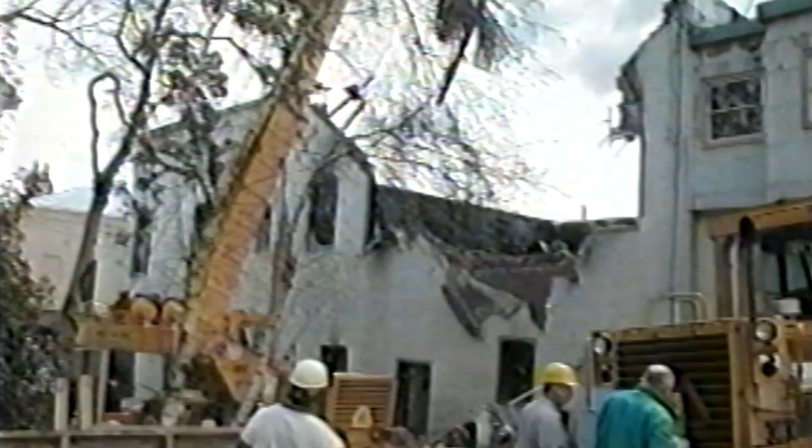After the fire, the first big step was to secure the site, make it safe for people. We immediately hired Robinson Enterprises, a very skilled group of people with lots of equipment. They secured the site. The first thing that happens in a devastating fire like this is there's a huge fire investigation trying to determine the cause. The first month we were slowly removing material so that they could peel back the layers and try to get to the core of the origin of the fire.

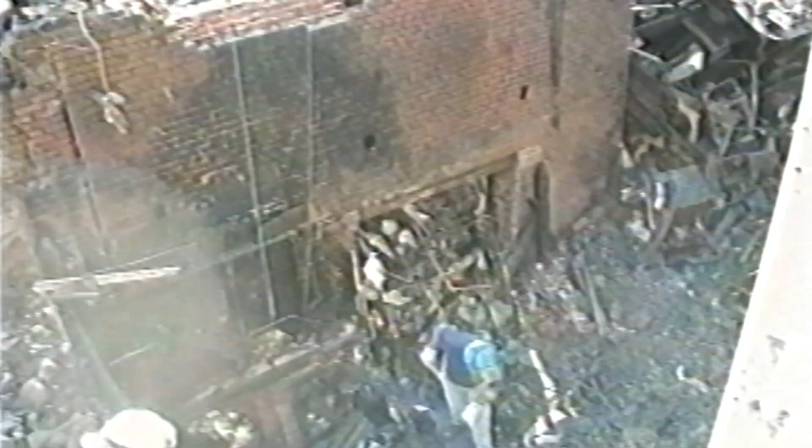Once the fire investigation teams determined that arson wasn't the cause, then they backed away, because the real cause is not as important as long as it wasn't arson. But after they finished their investigation, they released the building for demolition, and within an hour the building was on the ground, because it was a safety issue.

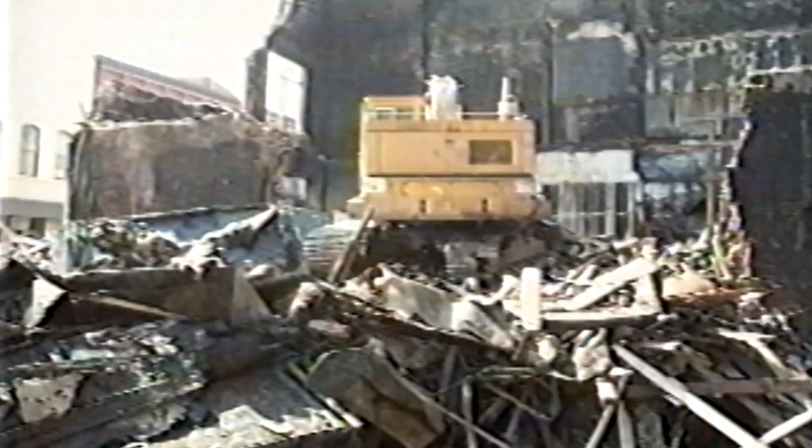We were all worried about the big, tall brick walls falling into the street, so we got the building on the ground. Tremendous volume of debris had to be removed. All the debris was hauled directly to Nevada, and the site was cleaned up. That process took about 2 weeks.

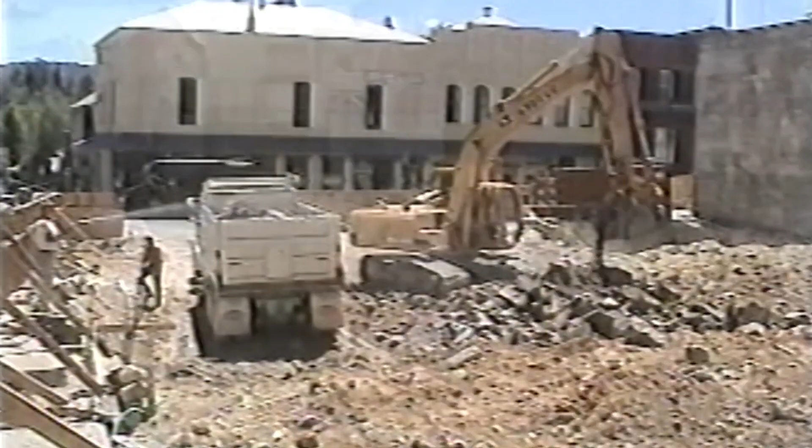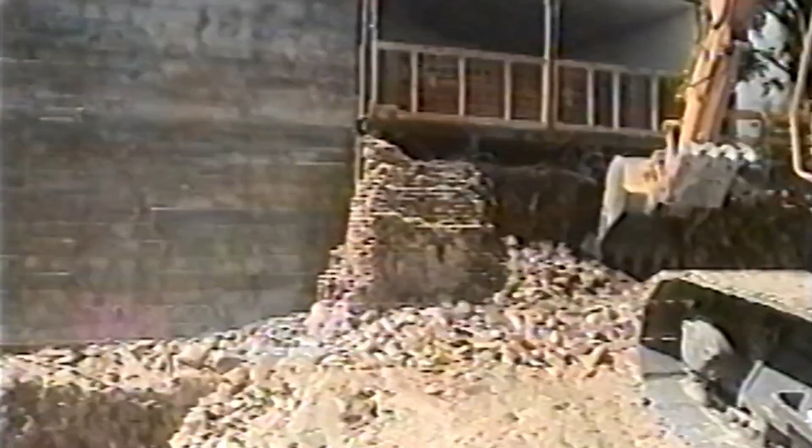We had some difficult phases to complete. We excavated back under the old theater and had a lot of retaining wall issues against neighboring properties, because, you know, these buildings are all built right to the property line, and it was very, very tough.

The theme was the heart and hands of Nevada City, a proposal that Leanne Brooke had come up with as far as decorating the protective barricades we had to build around the site. Hundreds and hundreds of people placed their handprints on the barricades and wrote their names there, and it was something that added some beauty to a site that was just so devastated. And it was very special.

I've never ever seen a site that had that sort of personality. Leanne Brooke really needs to be commended for her thought process. She wasn't a business owner, she wasn't really directly affected, but it was a contribution she wanted to make, and it was great.

The first step in rebuilding the building was, number one, trying to develop a plan of how we're going to do that, and the first part of that plan is to get an architect. The process has been great. I love the people I've been working with, and it's just been a collaboration. People come up with ideas, and because it's sort of been a fluid process, things can get incorporated.

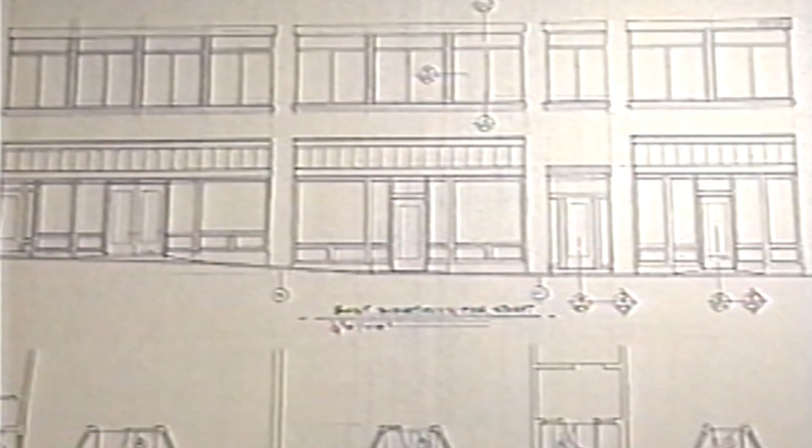So Bruce went to work within the first week on redesigning the building, and within maybe 3 weeks we had the exterior elevations done, and we had that proposal before the Nevada City Planning Commission within a month. To be able to go to the Planning Commission with a drawing like this and a stack of brick, and have them say, okay, go for it - that shows they had a lot of confidence in the team to put it together. That this is a joy to work on.

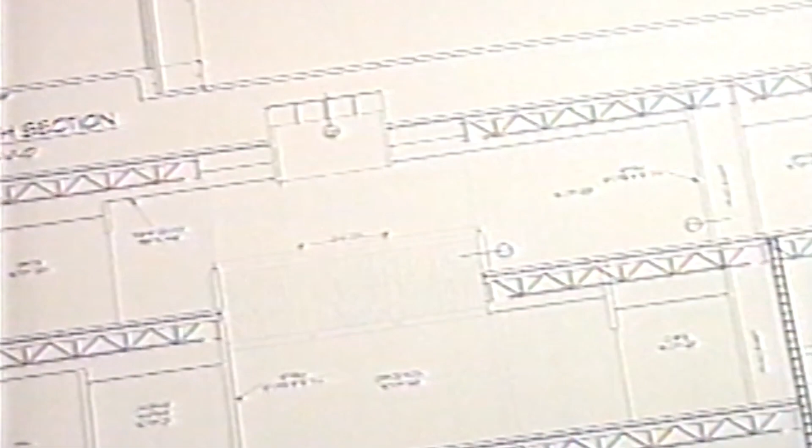Maybe other people didn't have as much joy as I did, I don't know. But it went pretty smooth, and had very little problems in creating the building once the drawings were completed. The only large change was in the foundations, which were major, but that's the first thing - if you don't have good foundations, you don't have a good building.

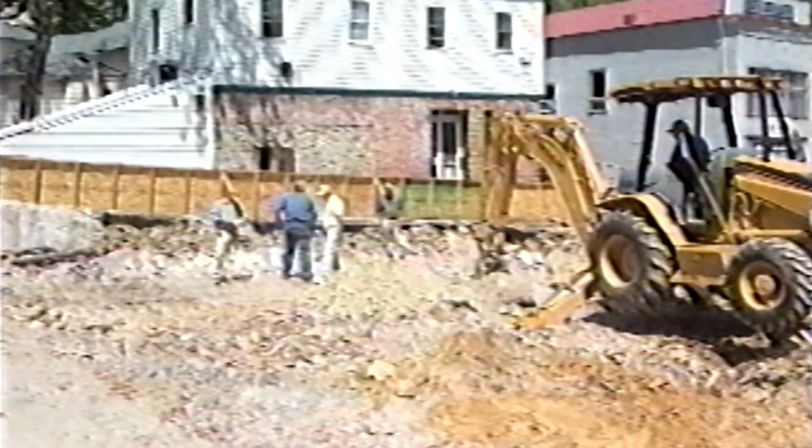Our soils investigation uncovered a riverbed and unsuitable conditions to support a standard foundation with footings. So the design was a pier and grade beam system where you drill piers, fill them with concrete, and on top of that pour a grade beam that spans the distance in between the piers.

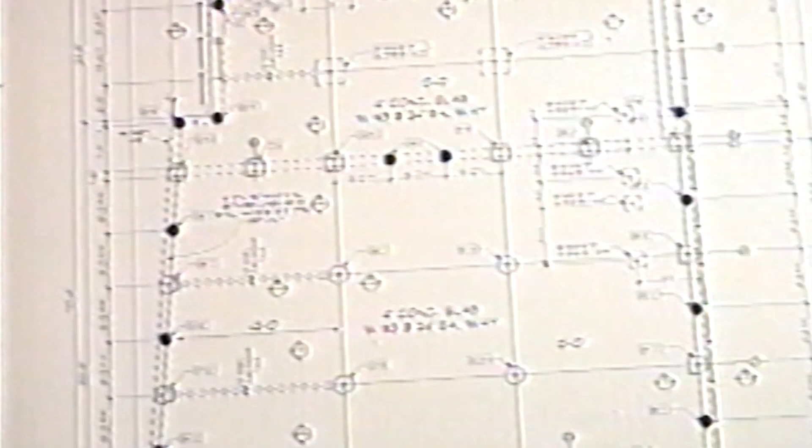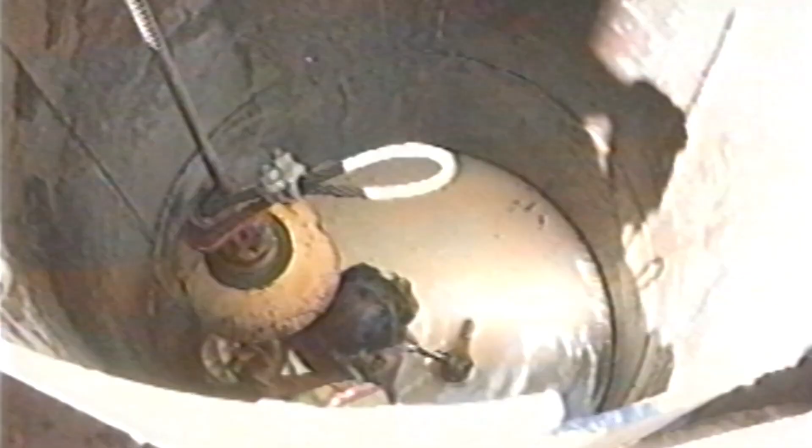So the drilling people I had to bring from down by San Luis Obispo, costing about close to $10,000 a day to have these people on site, and immediately started hitting groundwater. Now you can't pour concrete in a normal manner. You have to start pouring the concrete from the bottom of the hole and force the water out with the concrete. We had a swamp on the site.

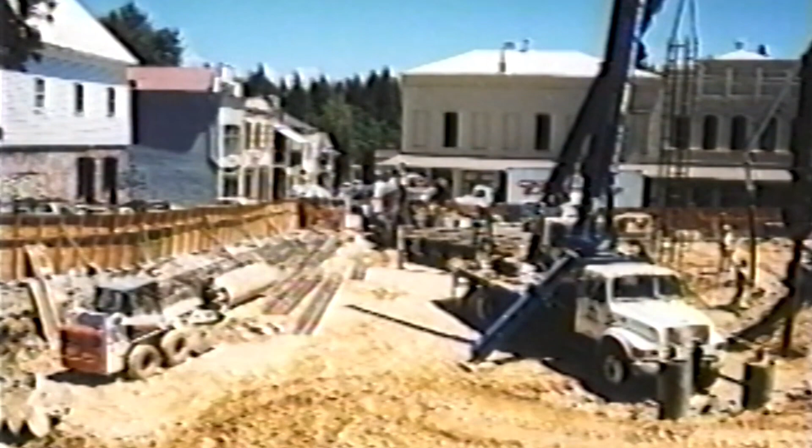I mean, it was an unbelievable, depressing mess, and it didn't seem like anything was going right. It was a process that lasted over 2 times longer than it should have.

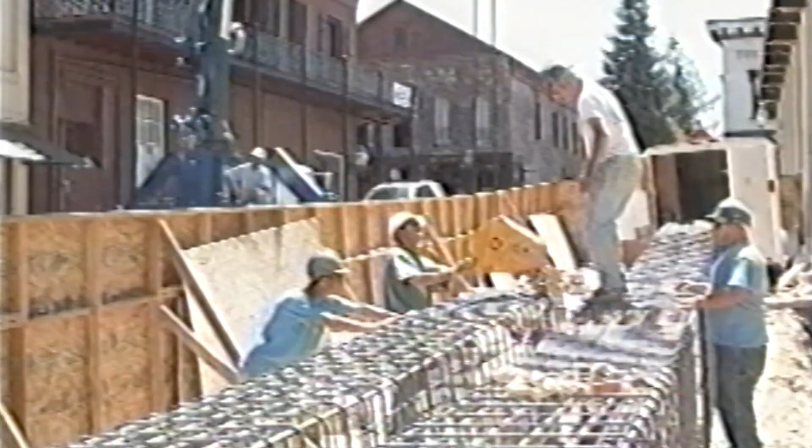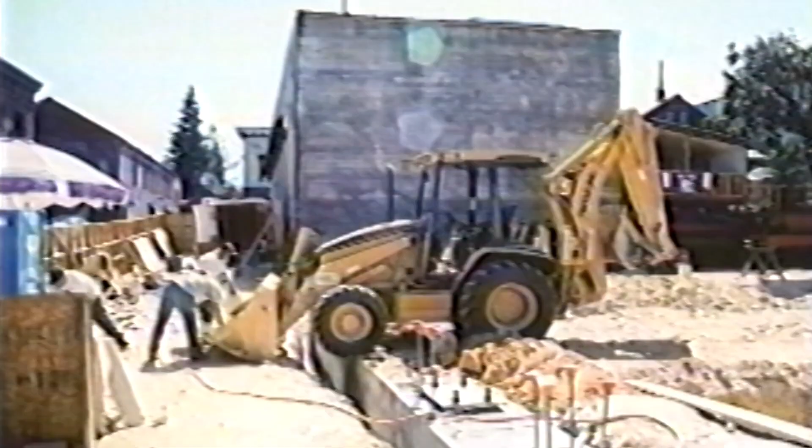The only good thing about it was that it ended and we were done. And it was a great feeling to have the drillers finally leave the site. Then we could get into some more normal foundation work, which was pouring the beams across the top of the piers, etc. A normal house foundation may have 60 or 70 yards of concrete, and the foundation of that building has over 2,000 yards in it.

So it's unbelievable. And then while they were putting in the footing and foundations, they finished the working drawings and kind of dovetailed them in. That took a little bit of work, and it wasn't so easy to do because there's things on the working drawings that overlap into the footings and foundations. It's just not a simple one, but...

Here it was, the biggest building project done in Nevada City for I don't know how many years, and it was going to be fast-tracked. First time a building had ever been fast-tracked in this town.

And so with Bill Falcone and Conley Weaver working directly with Bruce Boyd, scheduled weekly meetings every Tuesday at 1:30. All the issues were brought out in the open. All the design as it progressed was reviewed. As important as this project was, we still had to respect the city ordinances and the historic ordinance, and everything went through the exact same process anybody else had to do.

It's important that everybody know that this was a joint effort of the people of Nevada City. That includes the Planning Commission, that includes the City Council, the Chamber, all these people putting up with this and saying, okay, we're going to be in the mix.

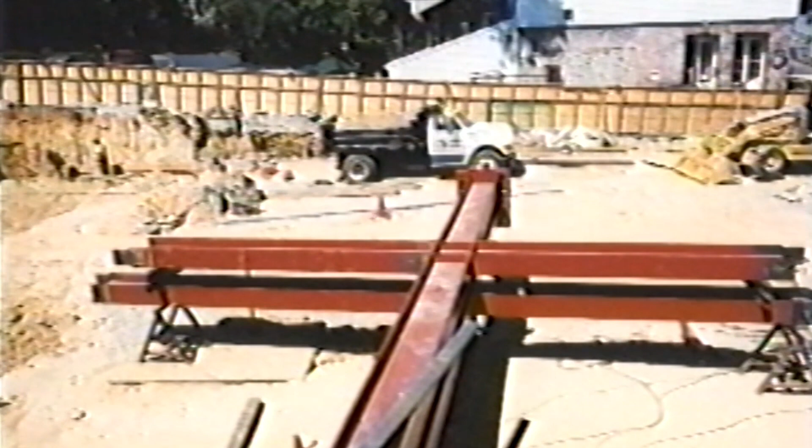I remember that meeting we had sitting around this table with Bob Porta and his couple of assistants and myself, Ray Powers and all here. Here we've got the site over there, we've got all the steel sitting over there. And the man that's supposed to be issuing the permit saying, yeah, I'd like to let you start putting that up, but I really can't.

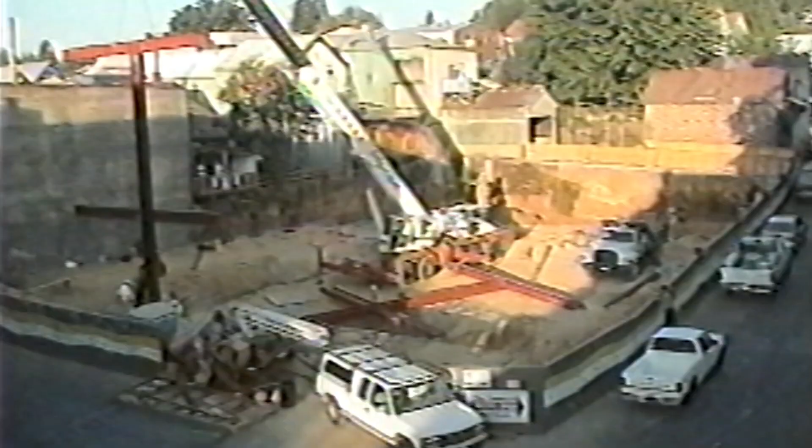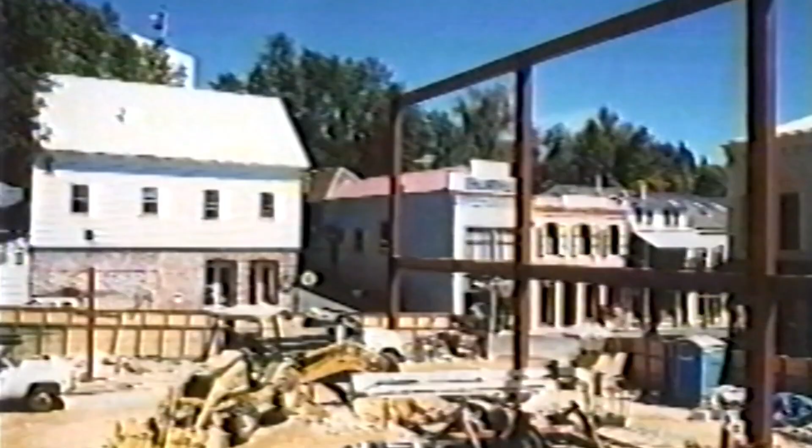They say, well, what can you do? So there was a back and forth, really back and forth bargaining to keep it flowing. The main thing we didn't want to do was... As we started putting up the steel, the first piece or pieces of steel that went in, it's the integral part of the structure of this building, called a rigid frame. So that rigid steel frame is what is providing all the structure, both horizontal and vertical, for earthquake and wind.

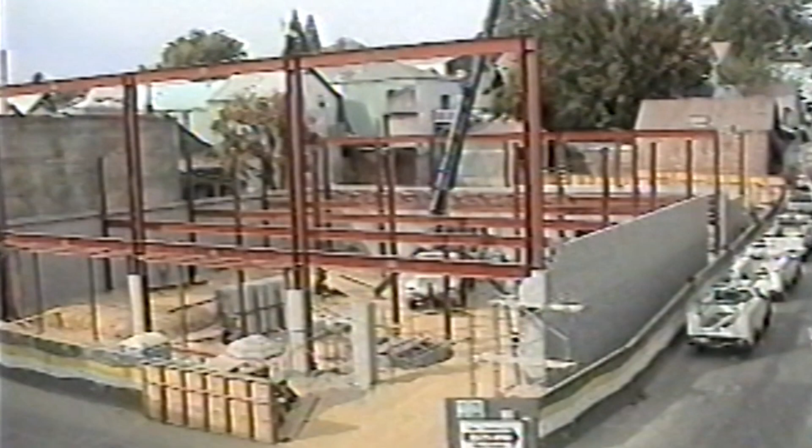I look at a building differently than everyone else. I look at the structure, and when the architecture gets in there, it closes up everything I like. I like to see the bones of the building all up and painted and looked well. I just didn't leave it that way, but that's the way it goes. My business is that way all the time.

The building, as we designed it, became basically a steel structure with a masonry exterior for strength, with a brick veneer on it. The masonry of the building is an integral part of the structure. It supports the floors in between the steel beams on the exterior. So the steel has to go up on a level, the block masonry needs to go up and be filled with concrete, and steel ledgers installed that carry the floor.

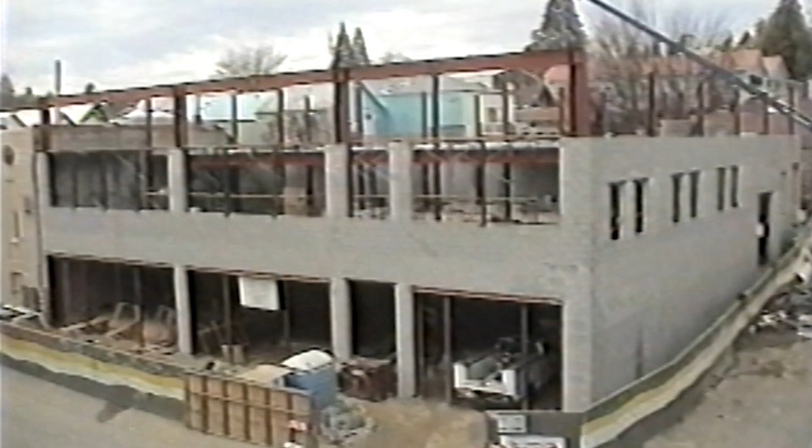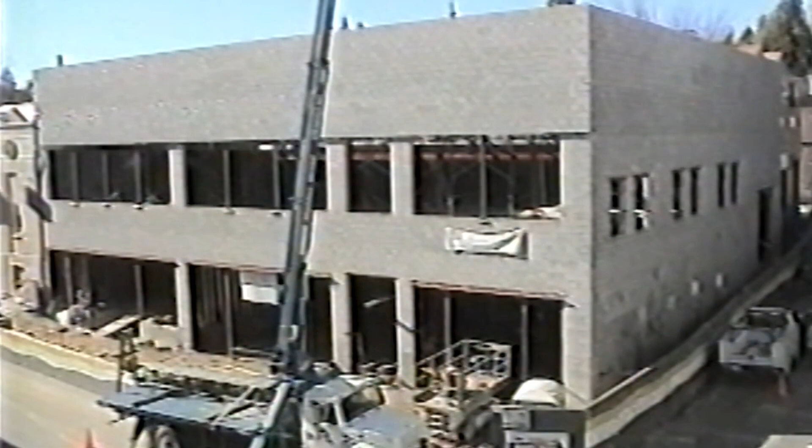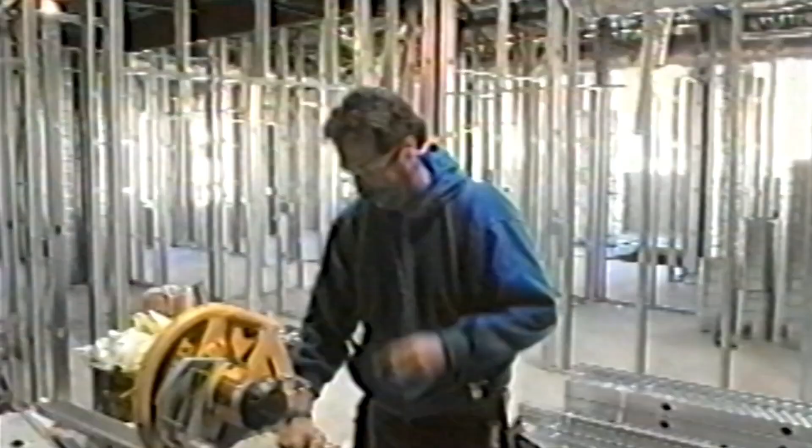Then the floor needs to go in. Then more steel can go up, more block can go up, etc., till we get to the roof. All of the floors of the building, including the roof, are all concrete. All the interior framing of the building is metal - we use steel studs exclusively. The building has a completely up-to-date fire sprinkler system now. Everything is up to code, so we have one heck of a building.

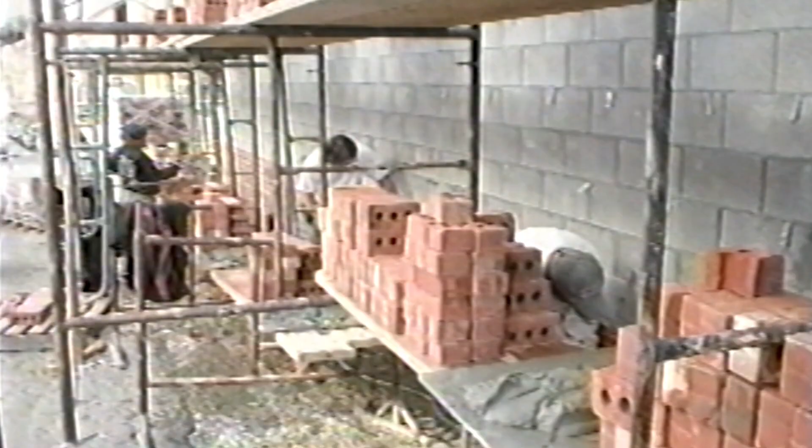Then we must have looked at 100 different bricks, and the qualities and how they're made, and what they consist of, and how they got their color. And I think Gary has a number of bricks in this building, but it must be close to 55,000 bricks or something like that.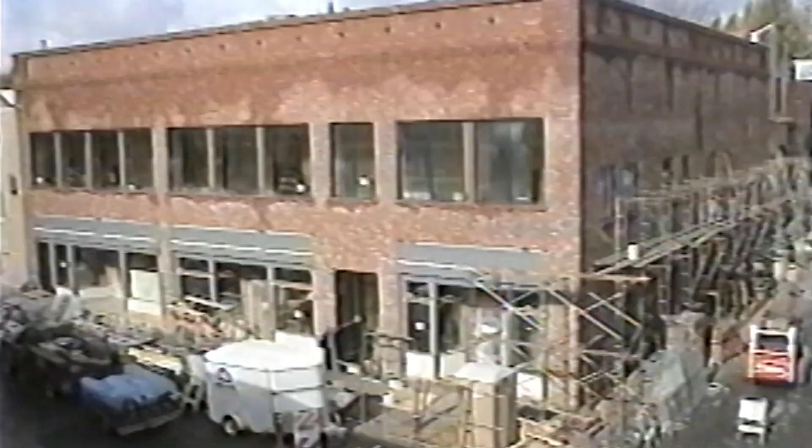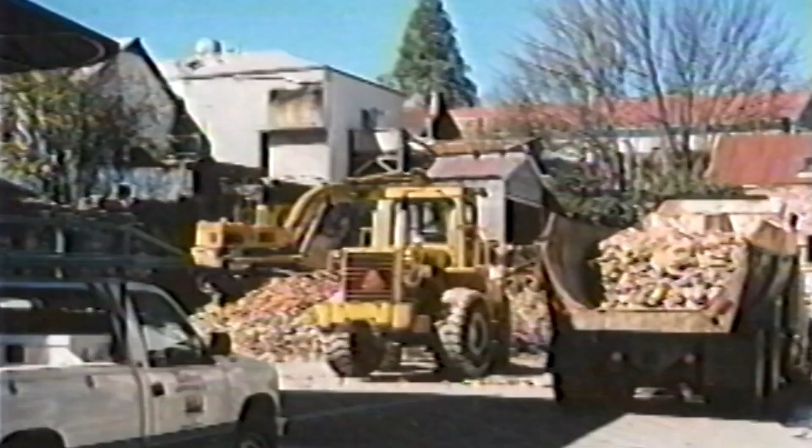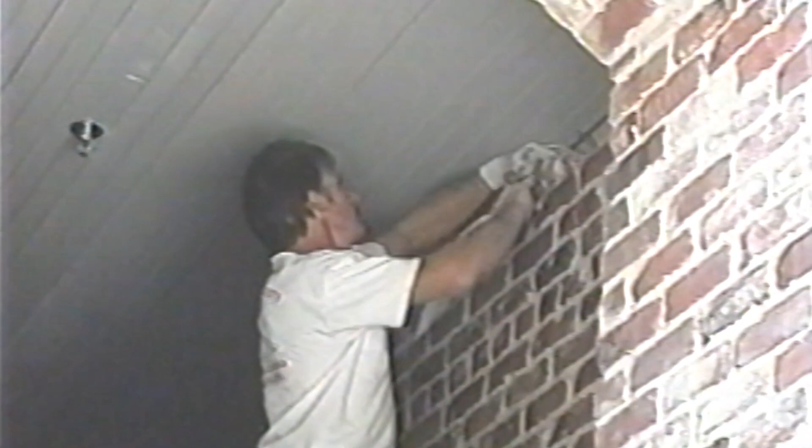During the course of the demolition, we had generated a huge amount of brick. We hauled all the brick to the old North Star property. We had 6 people cleaning brick for 6 weeks. They're just really nice looking brick, and we wanted to use them. The city jumped on the idea, and we got approval within a week to reuse those bricks on the old theater. It's a really nice feature of the building to retain those.

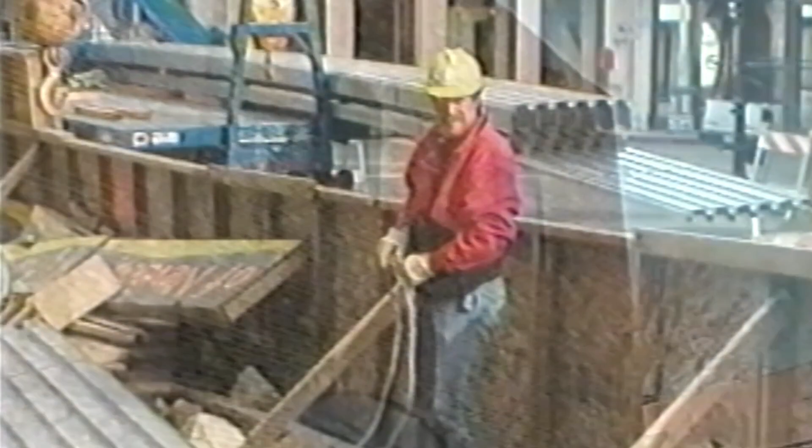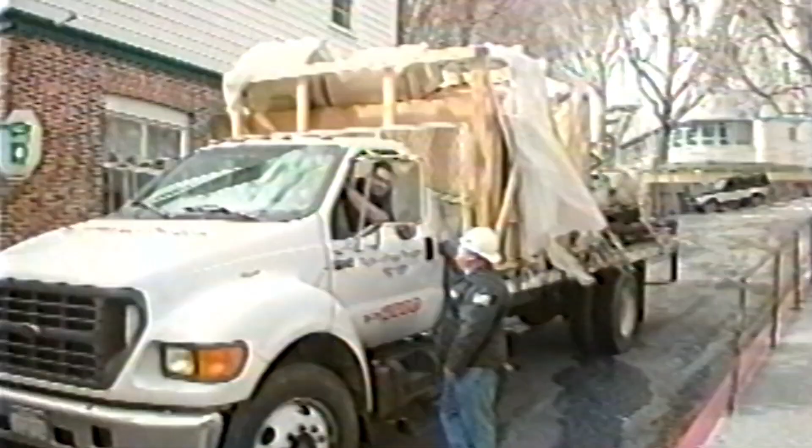We had no room to store material on the site, so we were stacking material inside our building and trying to use it up, and it was a logistical staging problem every day. We were causing tremendous impact on all of the businesses on North Pine and Commercial Street, and I'm sure on Broad Street. Everybody was really understanding, and I appreciate it very much.

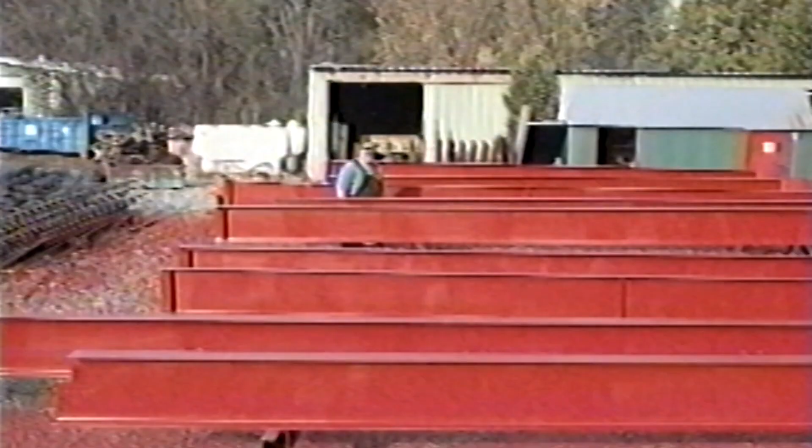One of the biggest focuses of this reconstruction is to use as many local people as we can. We have a tremendous talent of local people here, a tremendous group of people who are capable of really just about anything and are competitive, and we've used all those people on this job.

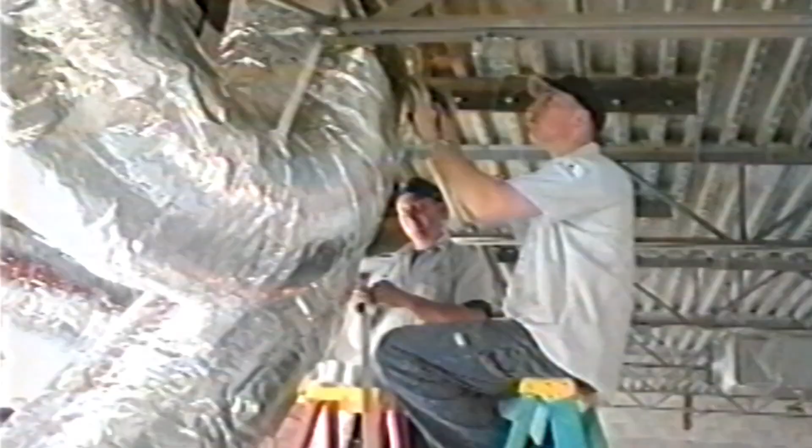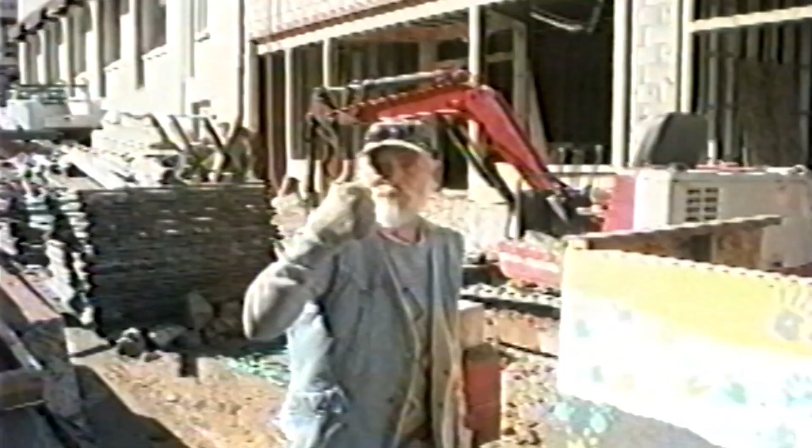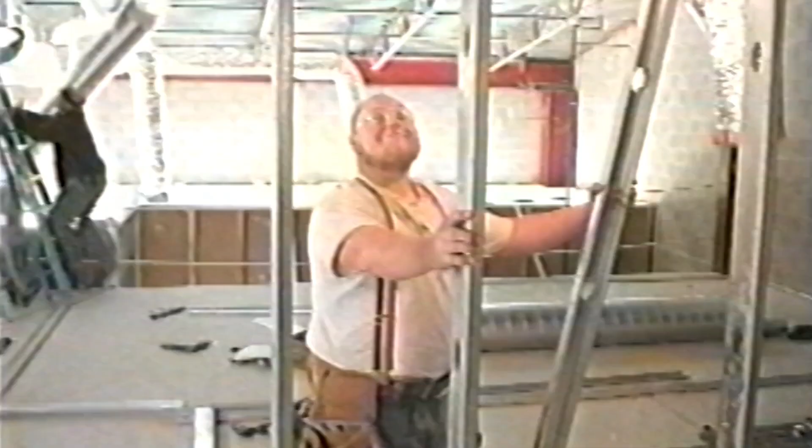But I can't thank enough all of the local subcontractors who have contributed to the project and who have followed the lead, I believe, of my crew, who has, as with all of our projects, set an example of hard work and quality workmanship, such that if one person sees that happening ahead of him on a project, they feel the responsibility to continue the project with that same attitude and the same quality. And I believe that has been carried throughout.

The Nevada County Building Department, who has inspected the entire project, has been great to work with. The City of Nevada City, we see them every day on site, and the question on their lips is always, what can we do to help? And Lou Travato, what he's done for us with traffic control, I can't say enough about what they have done for us.

Through all this process, this is a huge financial impact on everybody involved, and there's a lot of emotions and a lot of responsibility to put this thing back together and just make it work. I'm not certain how many people could do that. I think that Ken Baker and myself are in a position to make that happen. I really believe that under certain ownerships, there'd still be a big gaping hole on that corner. It'd be years before somebody was not afraid to take the step. But since we have utmost confidence in what we can do, we did not hesitate and moved immediately forward.

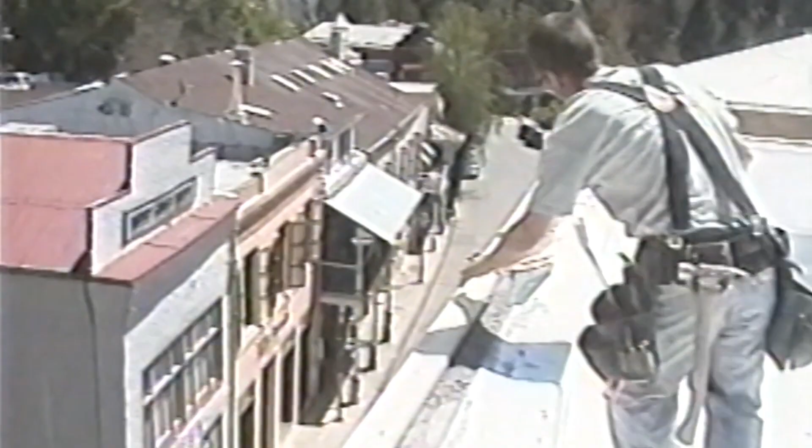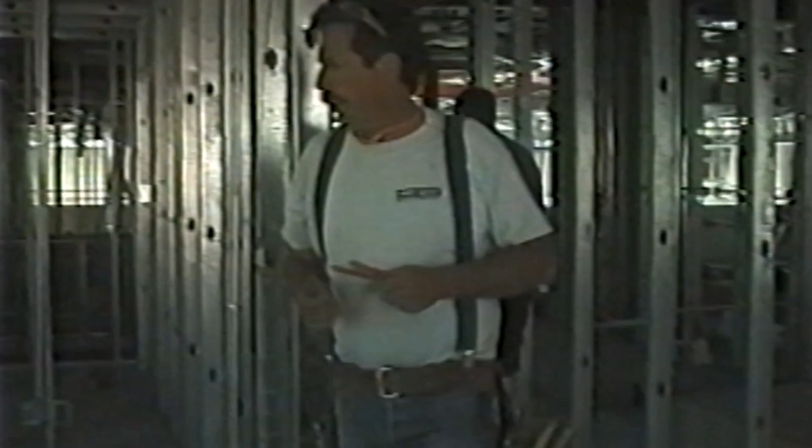And now, finally, as we reach the end of this long project, I can look back with a great sense of satisfaction. I feel really good about the project today. I can see everything's coming together. You see the details off in a distance, but it's all a fine symphony that's finally now being played, thousands of notes, and maybe there's a few sour notes, but you've covered them up and played louder with some good notes. But it's a symphony, and I think it's sounding pretty clear in downtown Nevada City right now. I feel really good about it.

I think that almost everybody who drives by is amazed at how much work we've done in a year and how beautiful it is. I mean, the brick is just really one of the highlights.

Generally, I've really felt there's been a good positive spirit about the crews, everyone coming in here. No, just a hard, tough job to do. A lot of drilling in the ground, a lot of work to get to here. Been here quite a while. The foundation was a little tough. The big, massive holes, those days were tough.